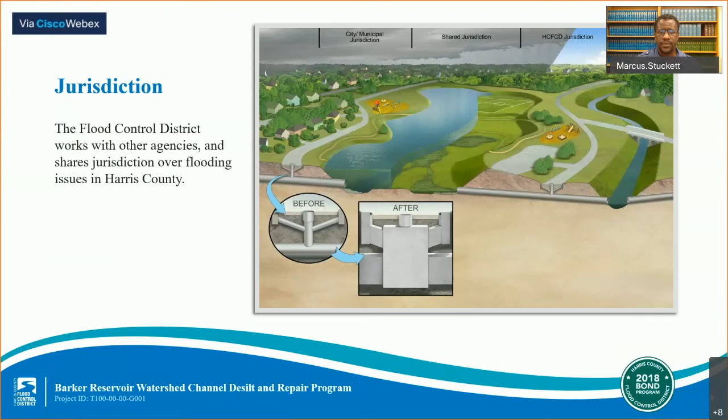So on August 25th, 2018, Harris County voters approved $2.5 billion for flood risk reduction projects. This vote followed a series of meetings across Harris County in each watershed, which resulted in a list of 181 bond projects, including 5 in the Barker Reservoir watershed. 144 of those 181 projects have been initiated so far.

A total of more than $680 million in partnership funding received so far stretches this bond program even farther. The actual timing of individual projects will depend on a variety of factors, including environmental permitting, right-of-way acquisition, and utility relocations. Project lists and schedules will be updated periodically.

Partnership funding is an important aspect of the 2018 bond program. This graphic illustrates the many sources of federal, state, and local funding the Flood Control District is working to secure for Harris County. Each agency has its own definition of eligible projects and its own requirements for local match funding.

So tonight we'll be discussing the Barker Reservoir Watershed Channel Desilt and Repair Program. This is Harris County Flood Control Bond Project ID F-52. There are 47 miles of open waterways that drain into the Barker Reservoir that make up the Barker Reservoir watershed. To the right is this map of the Barker Reservoir watershed, which is shown in the light gray, and the boundary of the Barker Reservoir shown in the darker gray.

The program we are talking about tonight involves desilts of channels to restore them to their original design capacity and repair erosions and slope failures where they have occurred. Work efforts began before Hurricane Harvey as part of a watershed maintenance program. This program includes channels within the Barker Reservoir watershed for which the Flood Control District has property rights. The limits of this program do not extend west of the Grand Parkway. Channels included have been previously developed and altered from their natural state.

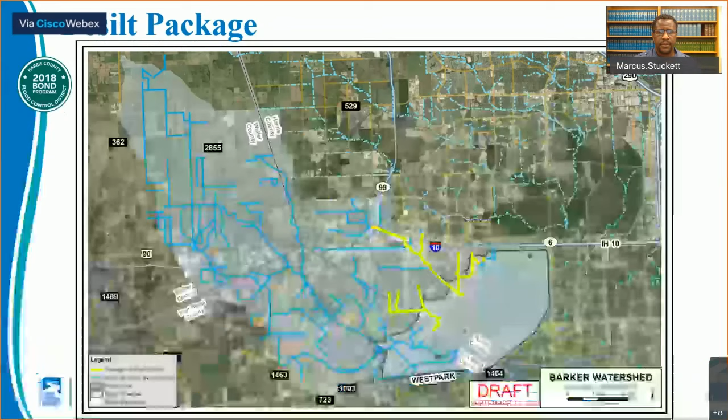So the current status of our desilts are as follows. Construction of the desilt package began in October 2020. Since construction began, no desilt has been completed at this time, but construction is expected to last 310 days. This exhibit highlights the desilt package as originally scoped. As I mentioned earlier, the construction for this desilt package began in October of 2020.

For the current status of the repair package, the site visits have been conducted and approximately 30% of the design has been completed. The boundaries of the repair projects are shown here.

So now we'll talk about the program schedule and the next steps. The program began approximately a year ago. Construction activity for the desilt package is expected to be completed by fall of 2021. For the repair package, anticipated construction is expected to bid early spring 2021. Another community engagement meeting will be held in 2021 for program updates. However, if you would like quarterly updates, this information will be shared on our project webpage.

And now back over to you, Sparkle. Thank you, Marcus, for that helpful overview of this project.

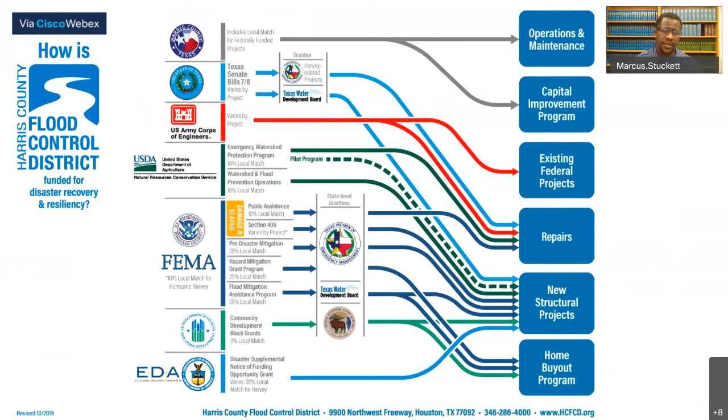Some of them prefer a more natural solution to flood damage reduction. Some of them are related to low to moderate income areas, but these are very important for us to partner with other agencies because it helps stretch the funding that we currently have further.

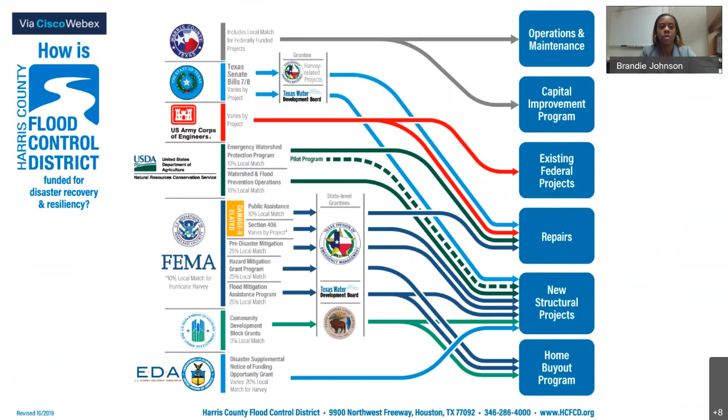All right, and Marcus, I'd like for you to take this one as well. Or actually, Brandy, I'd like for you to take this one. How many additional acre feet of water can the reservoir hold with the desilting project? So the reservoir is not owned or operated by the flood control district. So we would ask that you contact the Corps of Engineers or direct that question to them as far as the storage volume that the reservoirs can hold. Okay, thank you for that.

Yeah, Marcus, go ahead. And so I can add to what Brandy said. This project is purely a desilt of the channels, some portions a little bit into the reservoir and a large portion of them outside of the reservoir. But this project is not intended to increase a volume inside the reservoir. So the volume that's within the reservoir today will essentially be what it is once we complete these desilt projects.

Okay, thank you. And Brandy, we have a question from David. What is the schedule for T101-01-01 and T101-01-00? They are in my neighborhood. Again, I would ask if you would submit that comment with your contact information, and we can get back to you on that. That would have to be a coordination with the contractor as far as their schedule.

I do know that we did talk early on in our pre-construction meeting about those two channels, but again, it's means and methods of the contractor. So if you could provide us with your contact information, we will be sure to follow up with you with that answer.

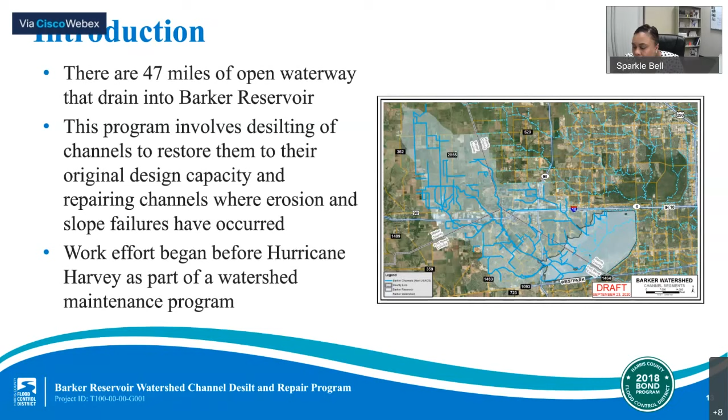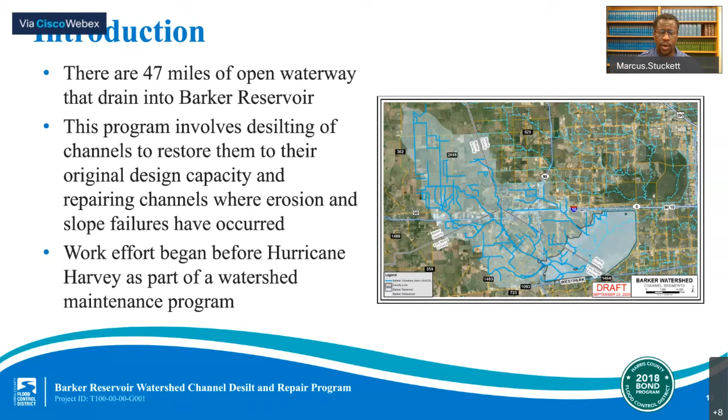All right, no problem. So again, this is Barker Reservoir Channel Desilt and Repair Program. It consists of 47 miles of open waterways. So these are bayous that drain directly into the Barker Reservoir. This program involves just the desilting to restore these channels to their original design capacity and doing some repairs of the erosion and the slope failures that have occurred over time. A large portion of the efforts that we're working on now began before Hurricane Harvey as part of our typical watershed maintenance program.

So all the channels that are included are within the Barker Reservoir Watershed, and they are within the Harris County Flood Control District's right of way and where we have property rights. The current limits of this project, they don't extend west of the Grand Parkway. We've included several channels that were what we call man-made channels, or channels that have been improved.

So the reason for not extending west of 99 was because most of the channels west of 99 are channels that are natural. So we don't typically go in and desilt those. We let them just remain in their natural state and try to go in after storm events and do things like de-snags to make sure that it remains an open channel.

This overall program includes approximately 22 miles of channels. That includes both the main stems and tributaries. And we are looking at having multiple packages for construction and desilt repair. For desilts and repairs.

So this is a map of the Barker Watershed. The larger area in gray here is the actual watershed. So this is all the area that drains into the Barker Reservoir. And the sort of darker area there is the actual limits of the Barker Reservoir.

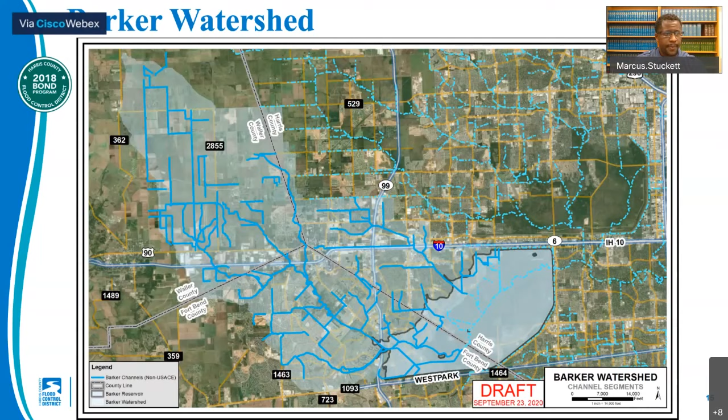So the goals of this project, again, are to do some desilts of the channels to remove the silt that has accumulated over time, to repair certain channel segments where we've realized some failures, and also to create that database for future maintenance that I mentioned.

So the question comes in, for most people say, well, what is a desilt? And what the desilt is, it's basically just the removal of sediment that accumulates over time. So after a heavy rain event, you get high waters, the water's moving pretty fast, and as the water starts to go down, it tends to slow down.

And so all of the silt and the failures that happen from having such a high velocity of water moving down the channel, that silt or that dirt, if you will, starts to settle out, and it just deposits at the elevation at which the water starts to drop down. And when this happens over time, you end up with an accumulation of silt along the channel banks.

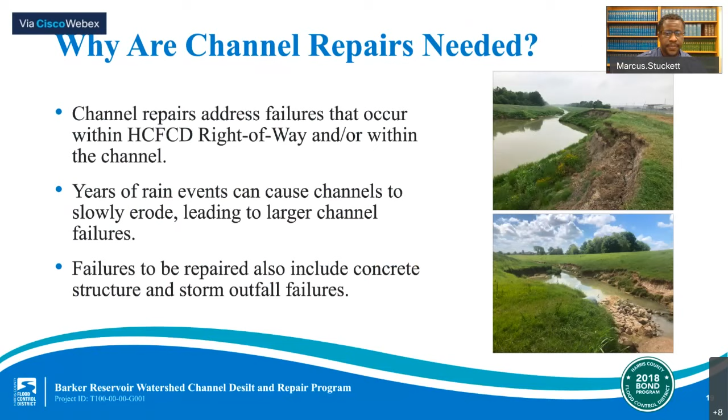So some expectations that you can plan to see during construction. Of course, there's going to be a lot of heavy truck traffic. There'll likely be some lane closures from time to time because these really large trucks have to get in and out of major roadways. So this will typically be in the form of a one lane closure, probably a flagman, making sure that traffic is able to move through and is slowing down to keep people in the area safe.

You can expect there to be some temporary closures of trails and footpaths. And I think Brandy mentioned it earlier in one of her responses. We just ask that when residents see these orange construction fences go up to block off an area, you avoid going around them or tearing them down and trampling over them, because they are just put there for the safety of the public.

Traffic control will be implemented when necessary. You can almost surely expect to see an increased amount of dust due to the dump trucks and excavators and other equipment that will be out there, and also the fact that we're moving around dirt that hadn't been disturbed. We definitely do our best to work with the contractors to make sure that we keep that dust down in multiple ways. They have multiple options to do that.

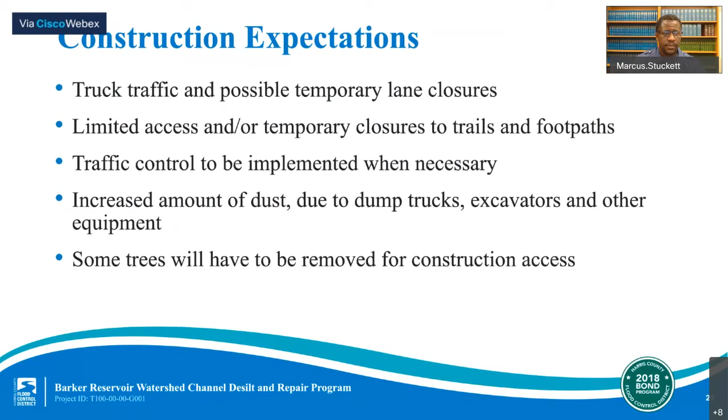So for the repair package, we've done all of our site visits and we're currently working on a design. So we're taking pen to paper and starting to draw up those drawings. That drawing effort, if you will, is about 30% complete to date.

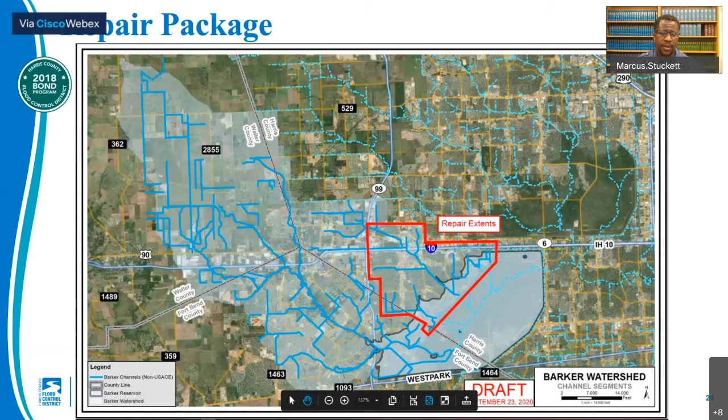And this map just illustrates the extent of the repairs that we intend to do as part of the Barker Desilt and Repair program. So our program schedule and next steps.

So again, the program began almost a year ago. The desilt is expected to be completed by fall of 2021. The repair package, we expect to bid that project out in early spring 2021. That's the one that we're working on now. That's approximately 30% complete in design.

We will be having another community engagement meeting at some point in 2021 just to update the community on how things are going. But quarterly updates will be on the website, and you can always go to hcfcd.org/F52 for updates on the project.

All right, thank you so much for that. Okay, we'll jump right back into the question and answer. It's always helpful sometimes to go back, especially when I notice a lot of individuals joining later. But we have had some questions to come in.

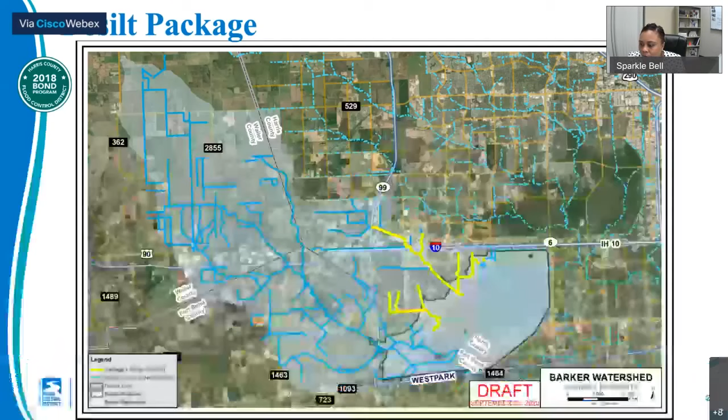And our next question, actually, ironically, Marcus, I'd like for you to take it. It says, I'm very concerned that the desilting will only fill the Barker Reservoir up more quickly. Archie, thank you for that question. Marcus, would you take it? Yes, and Archie, that's actually a good observation, which means it shows that you were listening to what I was saying about speeding the water up.

So it's important to understand that this desilt is taking the channel back to its original design. So, however many years ago when we originally designed this, the reservoir was already in place. And so the water that gets there now is the water that the reservoir was already designed to accept. So we're not widening it or increasing it past anything that would create a larger problem, because it's just going back to its original state. And just over time, that's just from the buildup of it. But it's a good observation, though.

All right, thank you. Brandy, I'd like for you to take our next question from Bob, and it's, where can I go for updates about the construction schedule? Is there a mailing list? Yes, I would recommend that you go to the website to find out information about the construction schedule.

However, I will note that you may not find a detailed construction schedule on the website, just because that could change depending on the contractor, it could be on weather, it could be on the number of crews available. So the construction schedule, as far as locations and the length of it, always changes. But as far as what channels have been completed, that information should be provided on the website for updates. So I ask that you please frequently check the website to see what has been updated.

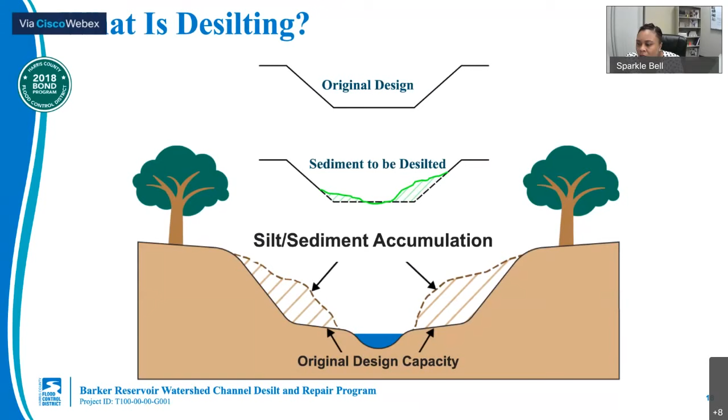Okay, thank you. And our next question is from Lois. Marcus, will you take this one? Desilting of channels is great, but what is being done to the reservoir so elevated pool levels don't flood our homes again like they did during Hurricane Harvey? Yes, Lois, and thanks for that question. We get a lot of questions about the reservoirs. So this program is the desilting, and it's working within the right-of-way of the Harris County Flood Control District and areas where we have rights to go in and do maintenance.

The Flood Control District does not maintain the reservoir. That is a Corps effort. And so as part of this project, nothing is being done to the reservoir itself to, as you mentioned, lower the elevations there. But I think the Corps are working on some things. And so any questions related to the function and the operation of the reservoir, we're going to defer to the Corps to answer.

All right, Brandy, would you take our next question from Hugo? How often will flood control be desilting channels after this current project? Yes, another goal and objective is to provide a maintenance plan for the channels within the Barker Reservoir watershed. And with that maintenance manual, we will turn the project over to our infrastructure department that's proposing that the channels be reevaluated after every major storm, as well as determine if their sediment levels are high enough to where desilting can take place every 5 to 7, possibly 10 years, depending on what that evaluation serves.